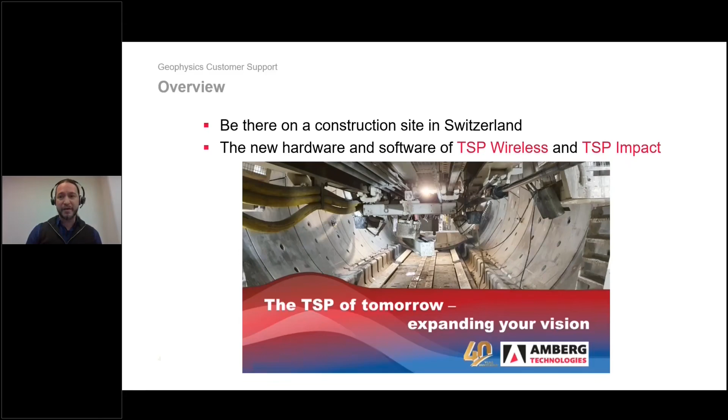So let's join me on a travel now in Switzerland. Good day to you all. I'm sending you today very warm greetings from Switzerland, and I hope to see you next time at your construction site or in your office. It's my great pleasure today to take you to a tunnel construction site where interesting things are going on. So be curious and come with me.

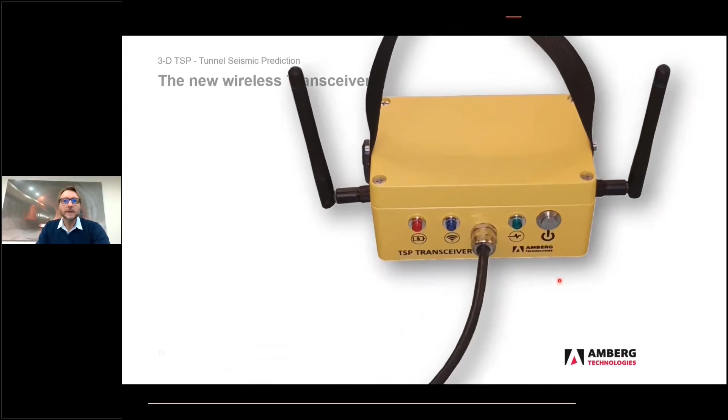So the wireless transceiver, as you can see, that little device over here, is to be attached via this cable to the receiver. You have seen that in the movie. And with a closer look at it, you see it consists of 2 Wi-Fi antennas. So we are using the Wi-Fi system either of the construction site itself, or we build up our own network. We have battery, Wi-Fi, and device status LEDs showing us at every time the status of the device.

And we have a power switch. On the side, we have a USB-C type charger and power supply socket with which you can easily charge the battery inside, or you can even attach a power bank, an external power supply, in case the internal battery is drained.

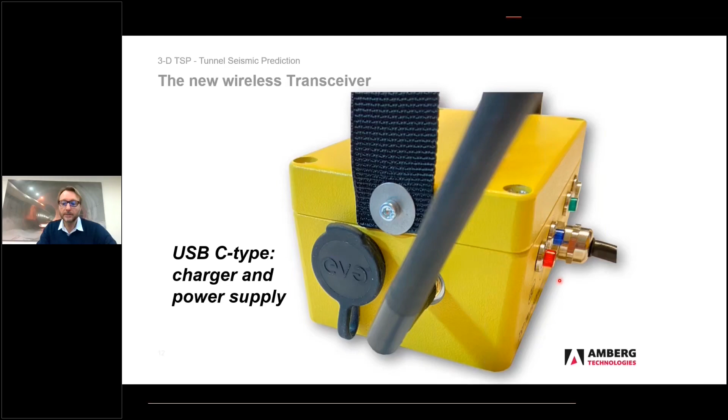You can also attach a little pen drive in case the wireless system fails and the shot, or the data of the shot, cannot be transferred. You easily attach a USB drive here and the data will be automatically loaded to this pen drive.

You see the specs here in an overview on power supply. This power supply inside the transceiver also powers the receiver itself. As you know, we are using an active accelerometer inside the receiver, so the power for that comes also from the transceiver here.

We have an integrated CPU, a processor, in that device, and this is, of course, with the highest precision of time synchronization across all transceivers. This is the biggest challenge of the whole wireless system: that we have the precise trigger moment, which is picked up from the trigger box and sent immediately to all the transceiver devices, and that we have, at the same time, in terms of microsecond precision, the trigger time to all receivers.

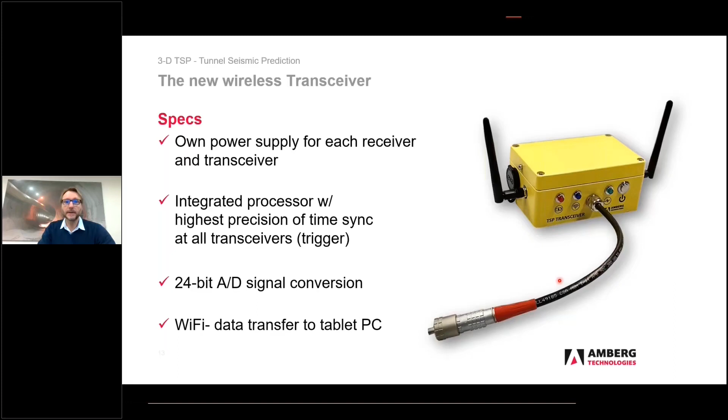In a common way, that's a 24-bit AD signal conversion, and that will be transferred to the tablet PC, which is also equipped with Wi-Fi.

So the new trigger box consists of very similar components as we have seen with the transceiver. We have again these 3 LEDs: battery status, Wi-Fi status, device status. We have the power switch, 2 Wi-Fi antennas, and the USB-C charger and power supply socket on the side. What you see on the right-hand side here is what you already know from the existing TSP trigger box. We have the trigger switch where you can attach a hammer or any other kind of source.

And we have here the socket where the cable to the blaster machine is attached, and the sockets for the instant detonator. So we're using detonators inside a borehole, or using non-electric detonators using the wire break trigger functionality over here.

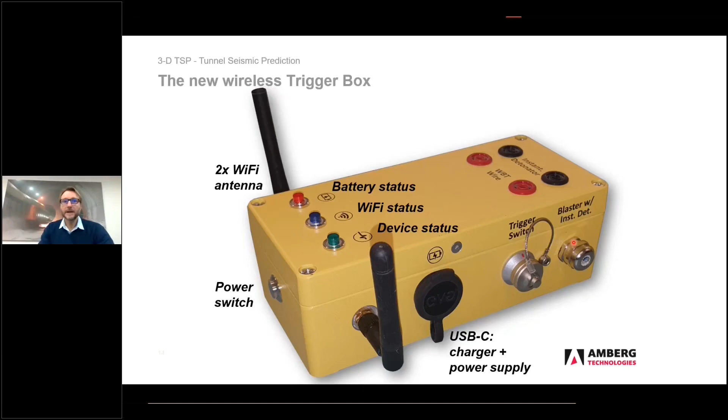So that is the same. Despite this, we have the same housing. So the same housing we could keep, and now also on that side we have the whole wireless solution. Again, there's this own power supply inside, a battery, which also feeds the little current which we need for the wire break trigger mechanism. We have this integrated processor inside here, and we support all kinds of trigger modes as usual, especially for blasting, but also for using a sledgehammer or the new impact hammer. Wi-Fi transfer, as you see from the components, is also given.

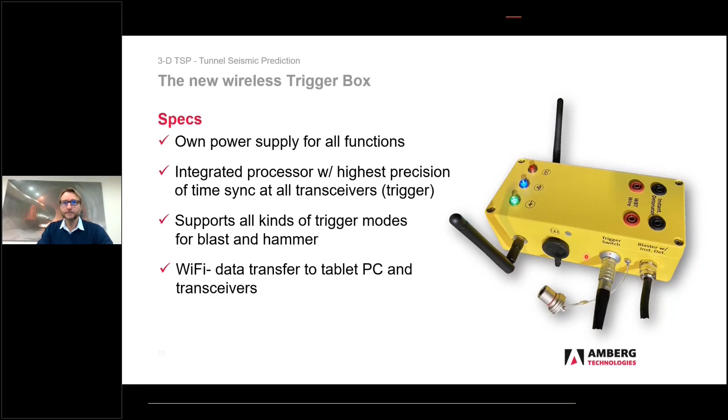So all the trigger signal is sent to the transceivers, and then from there to the PC. So how does the new receiver look? You have seen that in the movie as well. The whole receiver looks similar, but is different, as you see from that piece here.

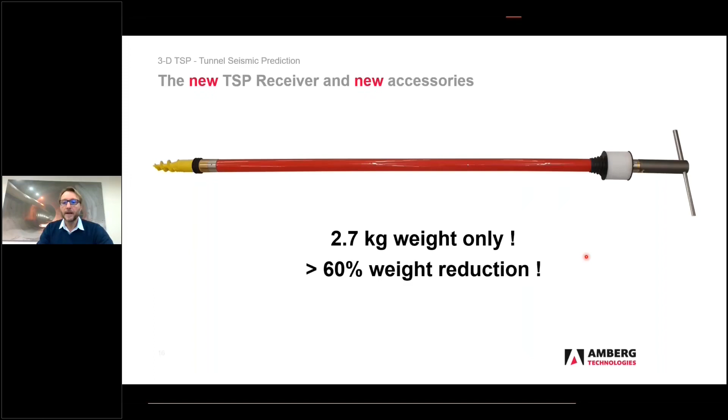The good thing is it only weighs 2.7 kilograms. All what you see in that figure is 2.7 kilograms only, including the protection tube, the receiver inside the dowel, and even the installation tool. And that is a plus 60% weight reduction compared to the existing system.

If you go a little bit into the single components, you see the protection tube now consists of just one piece. That is a good thing, so you have less operation or assembly time in the tunnel. We have a little plug cone at the end, which plugs the borehole mouth, and the whole thing is only 140 centimeters long. It's one piece, but one longer piece.

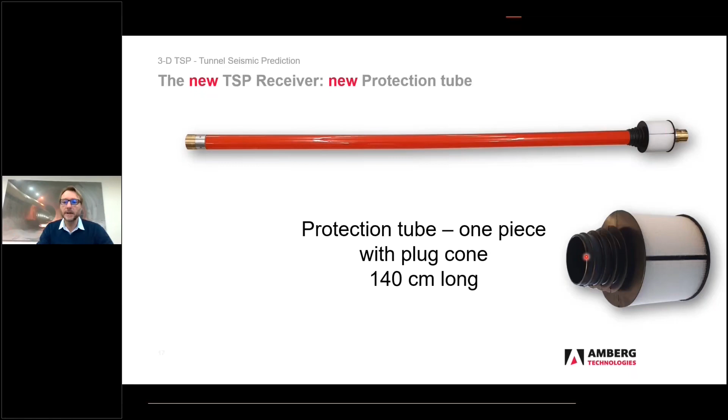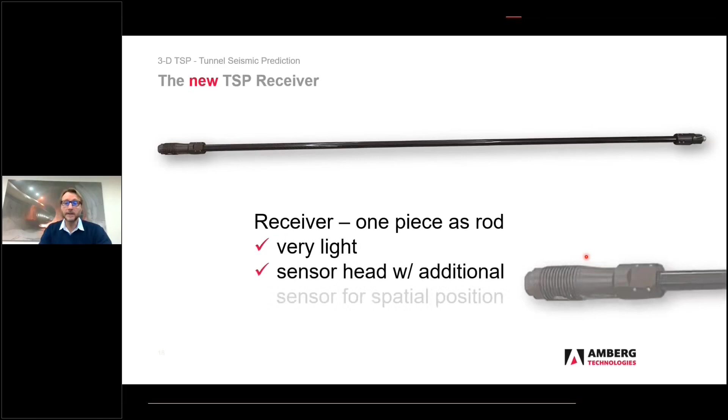So as you see from that, we have reduced the receiver size in length to 1.5 meters actually, as you see here how the receiver looks like. It's also one piece as a rod, and very, very light. What you see here in the middle part consists of a carbon rod, and we have used special aluminum for the left and right end sides.

What is also new is that beside the accelerometer picking up the seismic waves, we have added an additional sensor which picks up the spatial position of the receiver inside the borehole. We come to that later on. The whole is 150 centimeters long, so in future, even for boreholes if you're still working with explosive, we just need 150 centimeter long boreholes for receivers, so it's just one length.

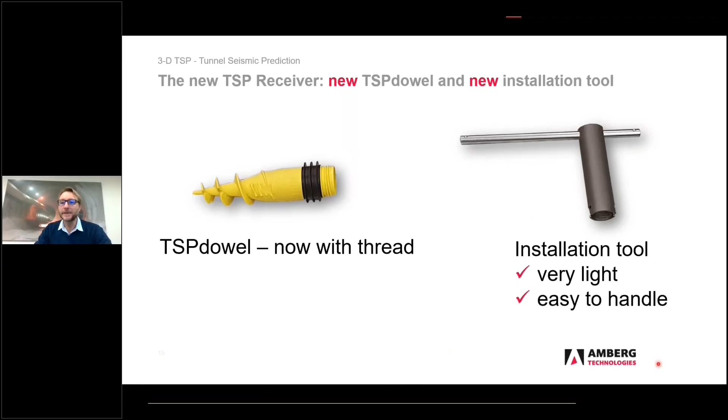So Joseph is now taking over. As Thomas mentioned before, we have included now a new sensor in the receiver. This is an integrated high performance e-compass, and this is an ultra compact sensor, as you can see here in this picture in the ruler.

So it is installed inside the sensor head, and it will make automatic measurement of these angles, the position of the sensor inside the borehole. So we mean the vertical, twist, and horizontal angle.

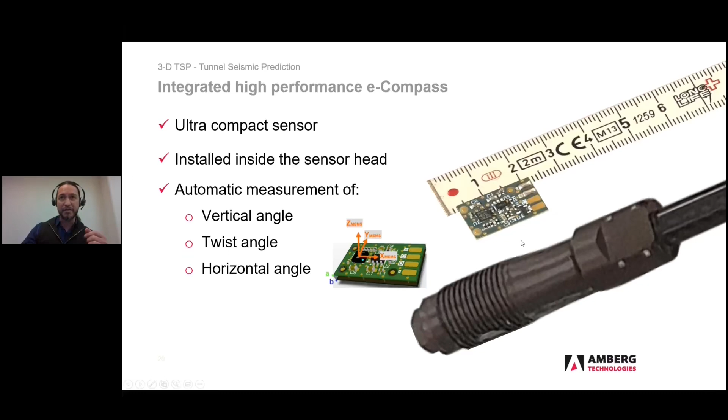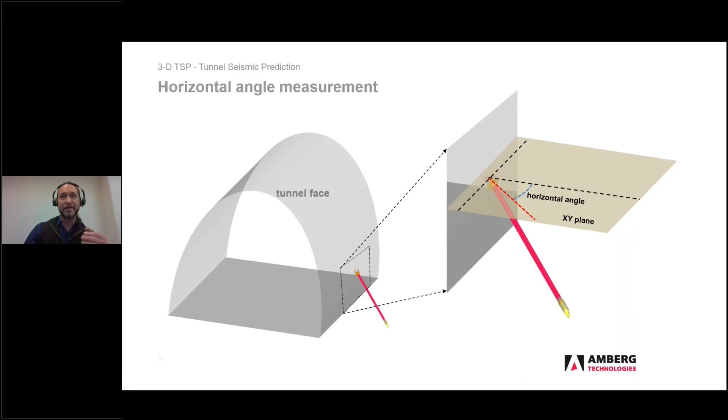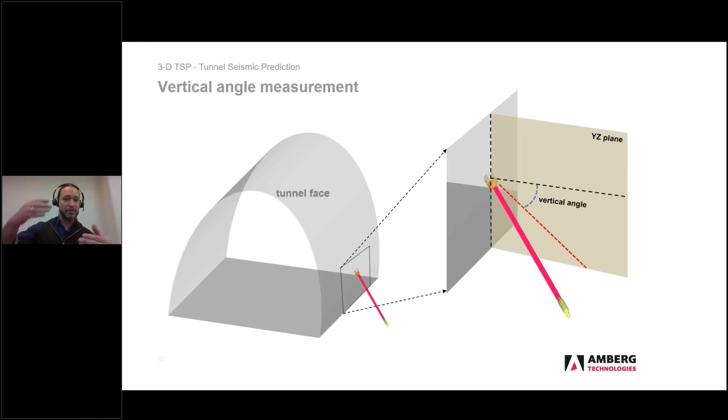So when we mention these angles, you know very well, but let's show you shortly. We are measuring automatically the deviation of this tunnel with respect to this plane, in the horizontal. We have the vertical angle also. You know that we use the spirit level to measure this, and also we can measure now automatically what we call the twist angle.

As Thomas mentioned, data acquisition now is in a very easy way. We have a very lightweight system, so it's autonomous, very fast to assemble or mount in the boreholes, reliable, accurate, and we have a long battery lifetime. So for the entire system, we have a weight reduction of 50%.

It's also easy to use in the software. I'm going to show you now in a nice video we have prepared.

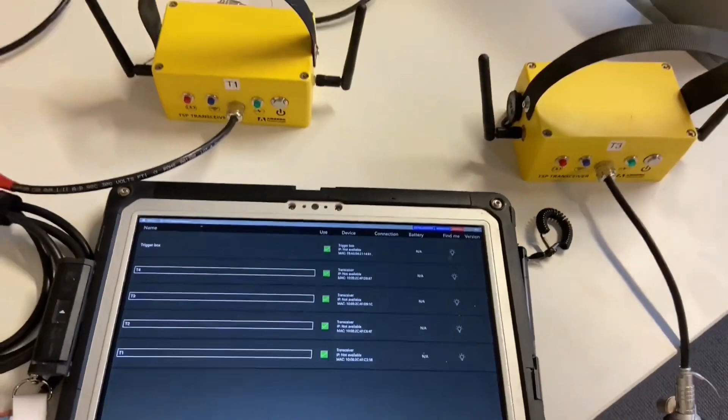Now we are in the software, Amberg TSP acquisition. First we will go to the home page. Now we go to settings. We have Wi-Fi devices, and here you can see all 5 devices. They are still not connected to the tablet.

Now we are going to start each of these devices, turn it on, one by one. Since we have already established a Wi-Fi access point between the tablet and the devices, you see one appears already on the tablet, it has been recognized. It takes a little bit because they are booting the processors, each of them. We will see the next one appearing. We see the status of the Wi-Fi and the status of the battery. Now we have all of them connected.

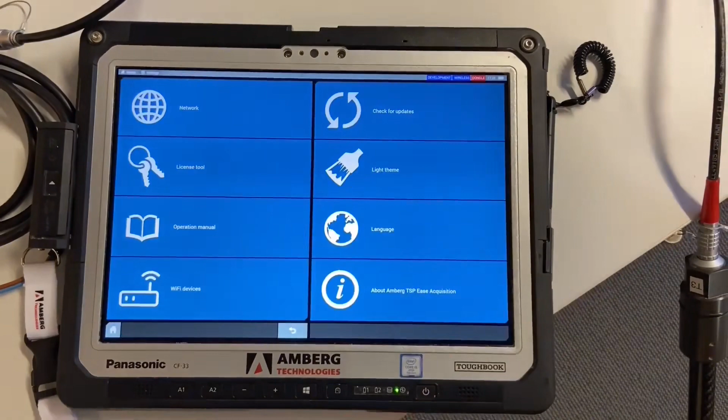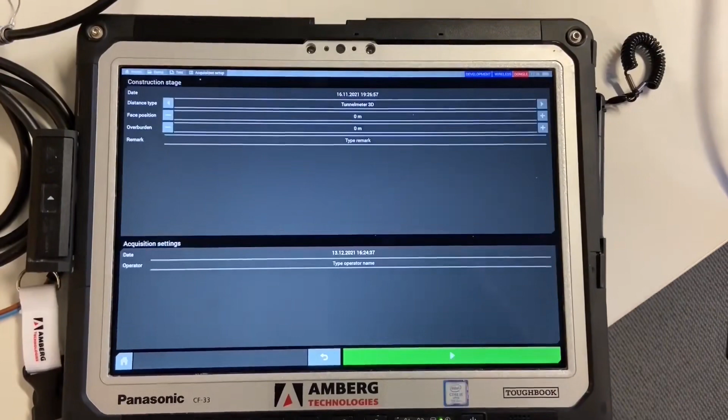We go now to the home page again, and now we go into one project. I select any campaign for this demonstration. You will see now we are in the acquisition wizard, as you already know it. There is one new feature here that you are looking at now, this geometry editor. I'll tell you this will be the next topic in our next user webinar.

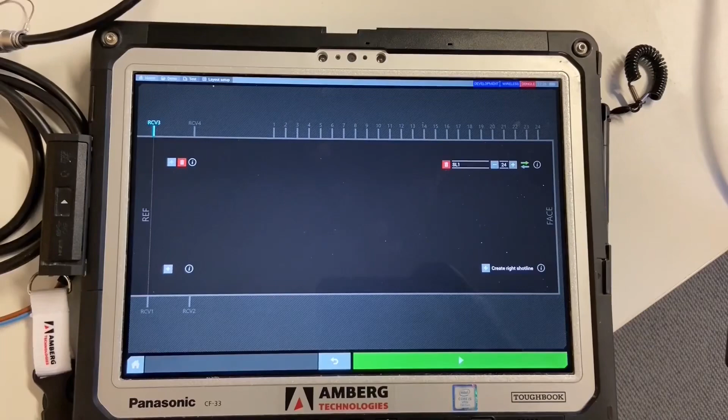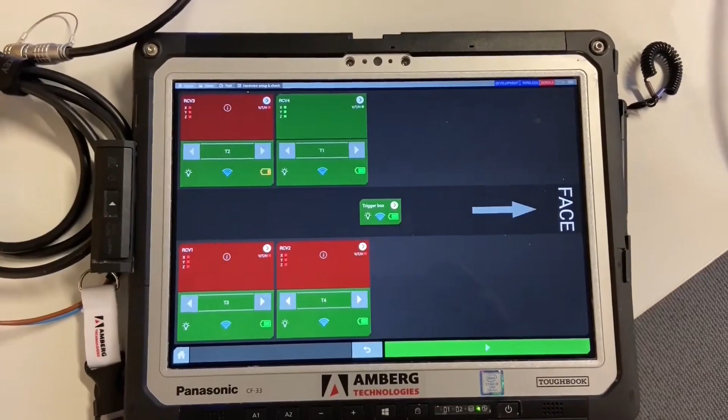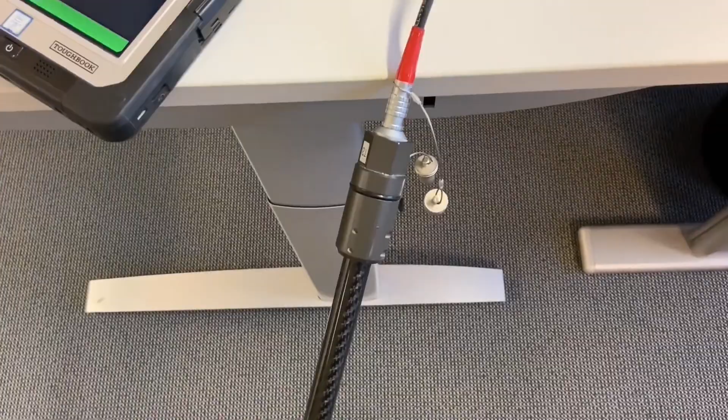Now we are in hardware setup and check. You see all the devices are connected and recognized by the tablet. This is the indication in the lower pane of each of these transceivers, as you can see here, showing also their position with respect to the tunnel face. We have only one connected to a receiver. It's this one that appears everything in green, everything is right.

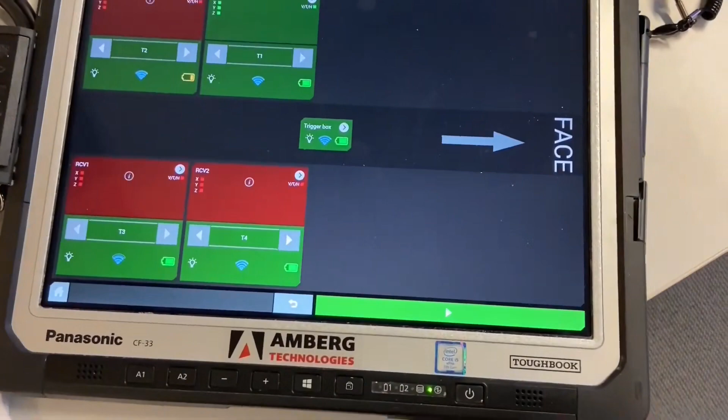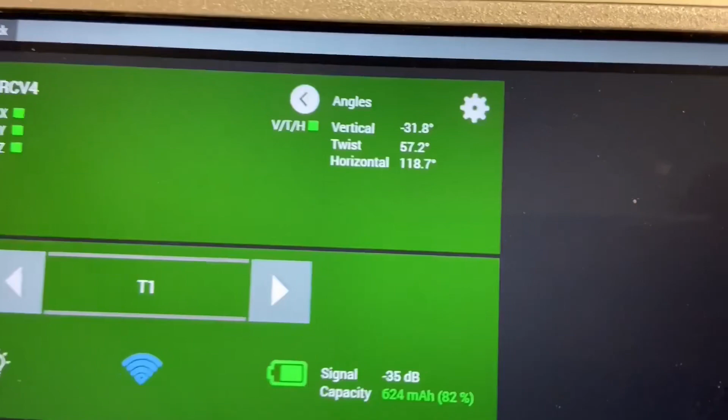We use the same coloring as in the existing acquisition software. As you see, this is transceiver number 1, connected to a receiver. We have the receiver placed between the desktop and the floor, with some angle, more or less obliquely, about 30 degrees.

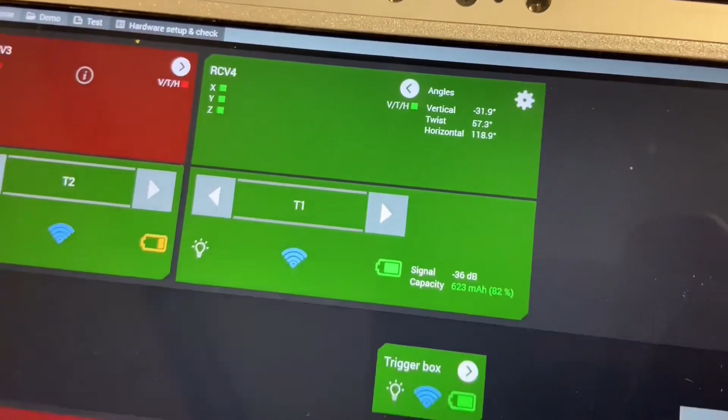Okay, now we go to the software again. We want to show you this new feature, the angles that are now streamed by this sensor, this e-compass. You see the vertical angle is about minus 32, because it's pointing downwards. We also see the twist and horizontal angles.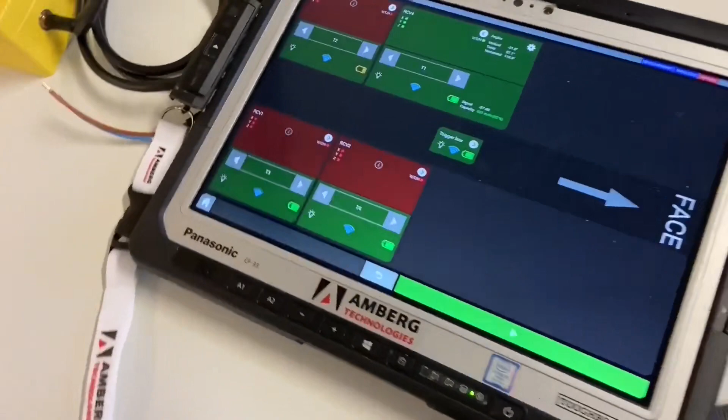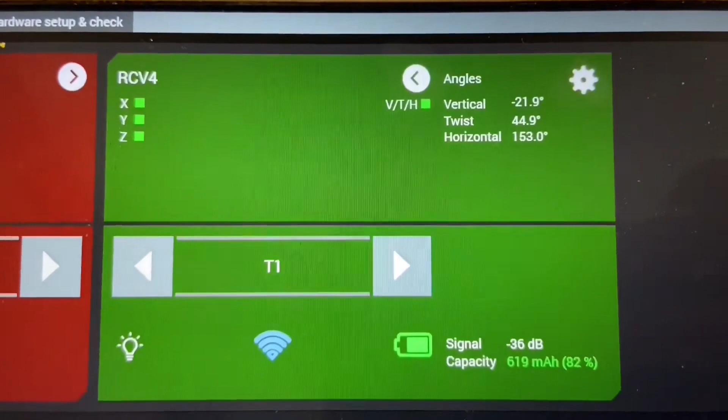Now you see the vertical has changed to almost 3 degrees. Now I will move it downwards, we go to minus values. I move it upwards, into positive values, then come back to horizontal.

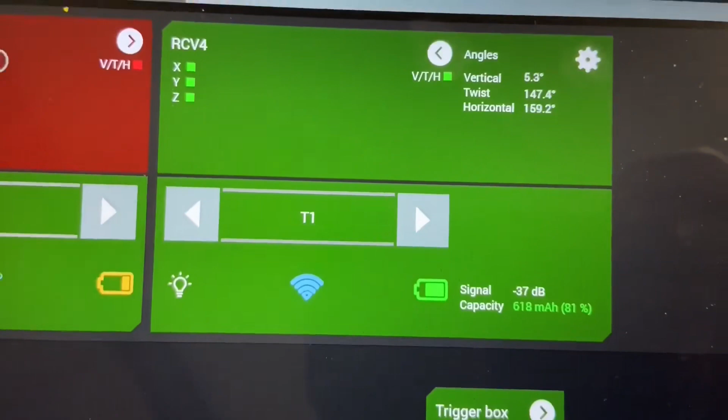Now I move the twist angle. You see the twist angle is changing from positive to negative values. Finally, I will move the horizontal angle, which is the azimuth of this receiver spatially.

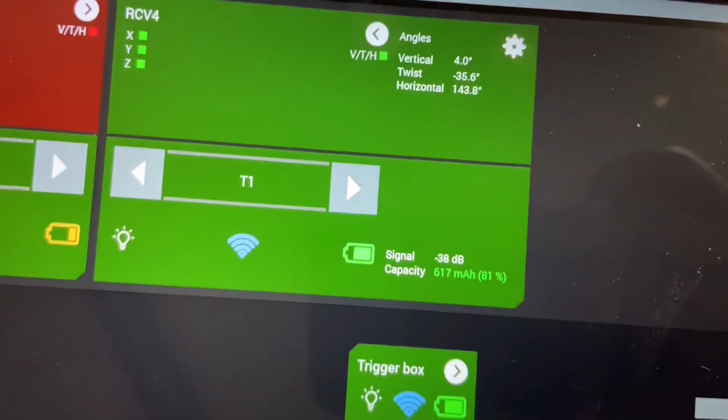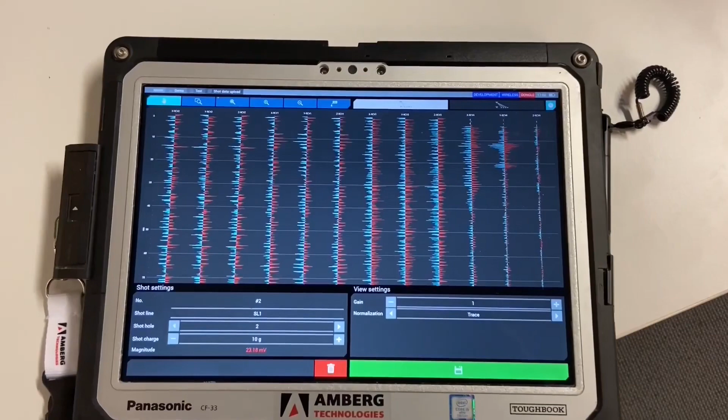Now we are in the ready for recording status. Now we simulate this with the trigger switch, and now you can see the data we have acquired. Of course, in 3 of the transceivers we have only electronic noise, but in the one where we have a receiver installed, now we can see the traces.

So now I'm back here. I'm taking over, explaining you now the next topic, which is about TSP impact.

TSP impact is using an impact hammer, as you can see from that sketch here. For example, in a TBM environment, as you have seen from the movie, the hammer was installed on a console on the left-hand side. In that case, it can also be the right-hand side, but it's on the side wall at a position where it fits well into the TBM housing. Even if there is a shield around, as you have seen in the movie, there's a little gap which can be opened for this double shield machine, where you can then install the hammer and let it strike every time a stroke of the TBM is finished.

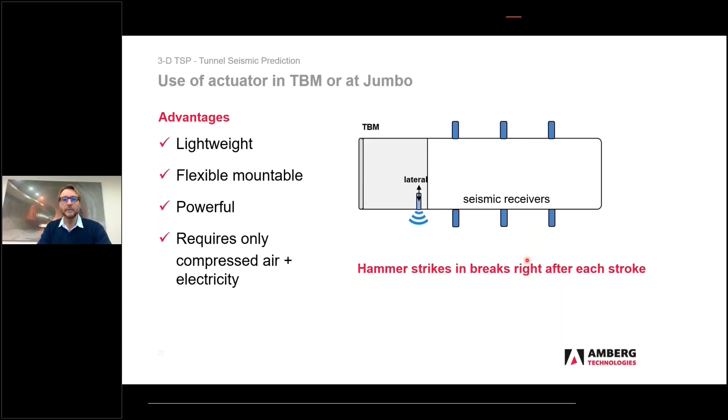That is given here, so you can use 4 or even 6 receivers. This is very lightweight, as you see. You have seen in the movie how the mounting of the receivers is done. You don't need anything else, you just install the receivers. The hammer, once installed, keeps striking every time there is a little break with the TBM.

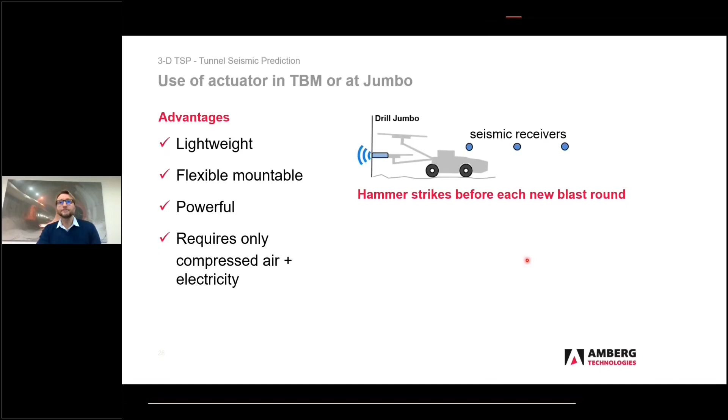You can use that as well. For example, install the hammer on a drill jumbo, or any kind of vehicle inside the tunnel. It can also be a little vehicle where you install the hammer at the front and move the vehicle stepwise, as we know from using blasting in boreholes. We can use that also in this kind of conventional tunneling work. That will then, of course, replace the drilling of boreholes and providing all the explosives.

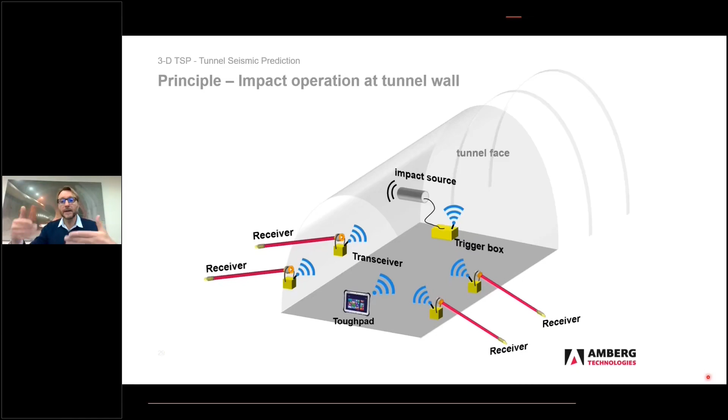For blasting, you don't need a blasting master, you don't need any kind of blasting material. You just provide this kind of vehicle, which is dedicated for this kind of job. We have seen that figure already here. So this kind of impact source is then hitting on the sidewall. It can also hit on the face, in case you want additional shot lines, you can even use that at the face itself.

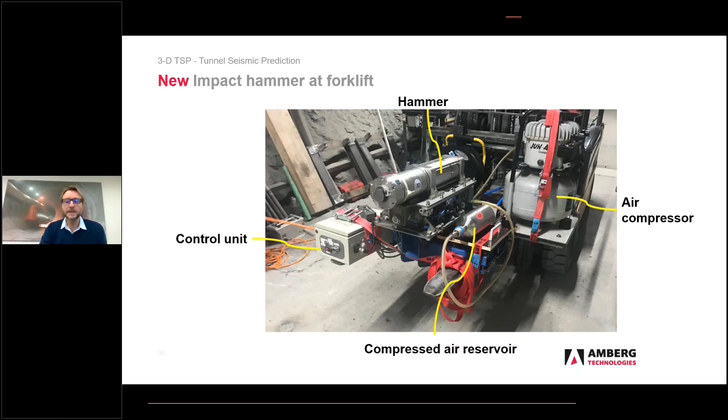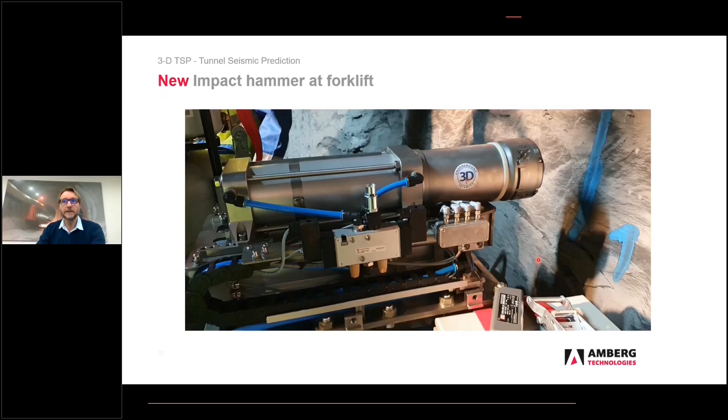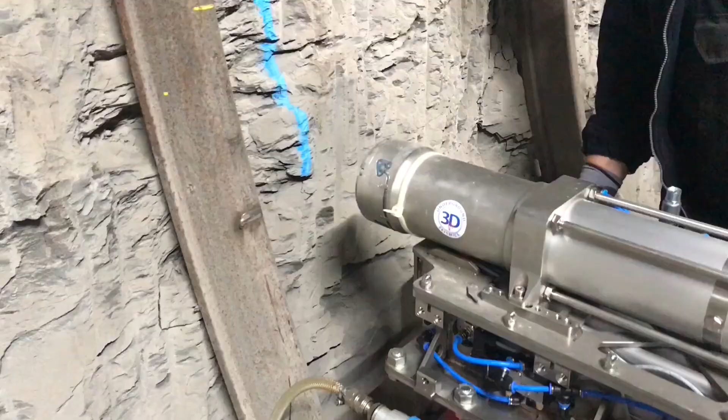That is the hammer, and here it is positioned in front of the sidewall. We have also provided a little video here. So it's pre-stressing.

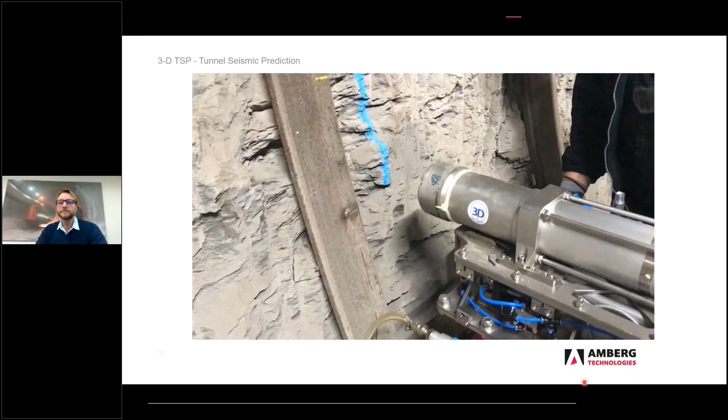First of all, now you should see the hammer installed at a little mini excavator—it's not visible yet. Okay, now you should see that: the hammer installed upside down at a little mini excavator. So you see the hammer can be used in any kind of position, whether it is inclined, whether it is upside down, whether it should hit the ground or the ceiling. It always works like this.

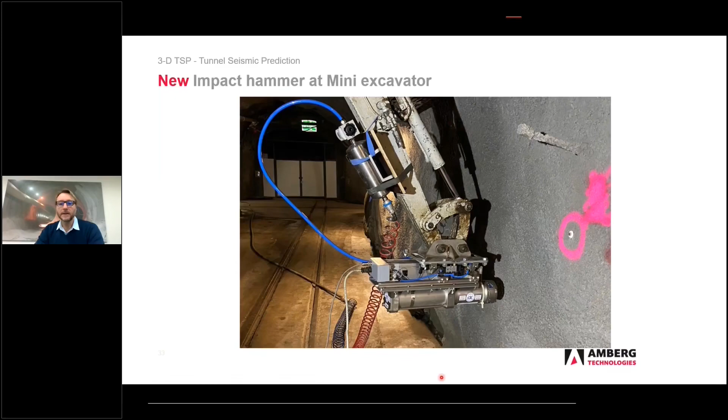So we just have the air compressor connection here and the installation of the electric cable over here, and that's what you need for that hammer. So I'm starting in the next little sequence of strikes.

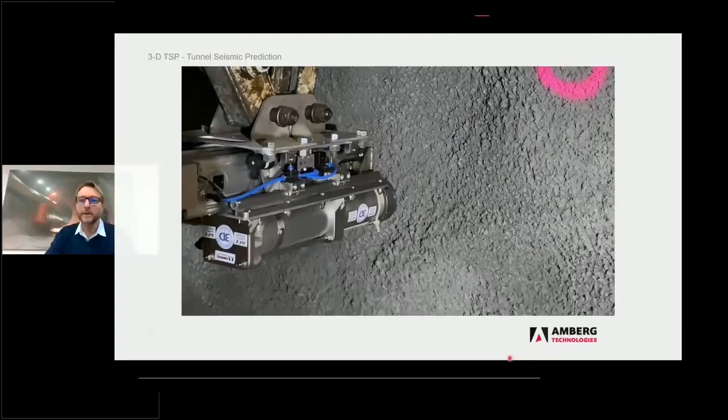See how fast it works on this concrete layer here. So every few seconds you can release strikes and get many strikes on the same position. That is actually wanted, and this is what we later do in the processing when we have stacking of data. But that is another topic which we already explained to you, but which we may repeat also in one of the next seminars.

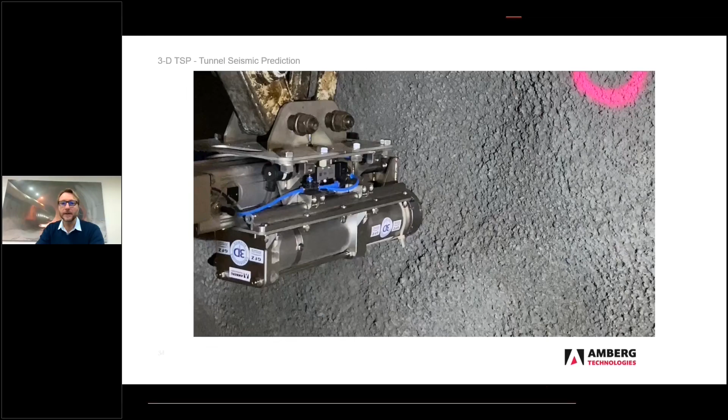Okay, you see now a little bit about specs. So the hammer and the base, as I said, the good thing is that both can be separated from each other by just releasing those 4 screws on both sides. That's quickly done. So each part, the hammer itself and the base, weighs 28 kilograms. That is, of course, heavy, but not so heavy that nobody can carry it.

But you just need to install it once to a vehicle or to a platform console inside the TBM, and then it's done. You see we can have more than 15 strikes per minute. The only thing you need as a supply is 7 bar of compressed air. That is always given, for example, in a TBM, in a conventional heading, as I said, with a forklift or with a single dedicated vehicle. You can use a separate compressor line.

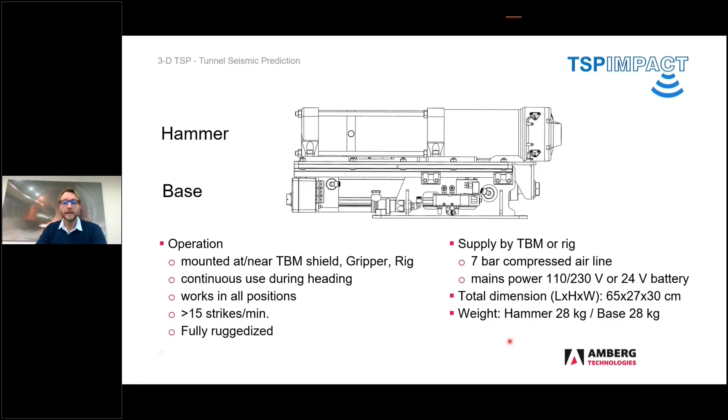We also need mains power supply, or if that is not given at all, we can use a 24-volt battery beside the hammer somewhere. Total dimensions, as you've seen from the video, are not really big, which is also a good thing. It's quite small and can be installed in normal sized TBMs under normal conditions.

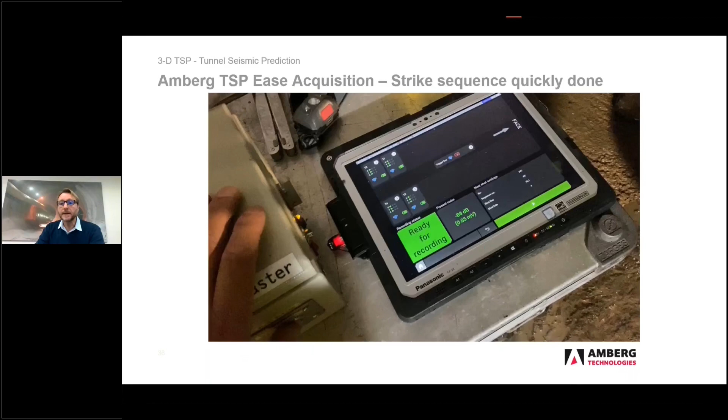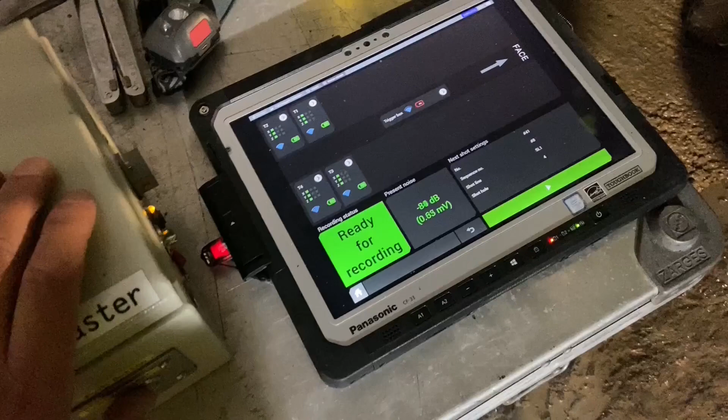The next video gives us a short sequence of shots. If you listen in the background, you hear the strikes, and you can see what happens inside the acquisition. It was ready for recording, waiting for devices.

We have here both transceivers and the trigger box. That was a nice shot. Trigger box, and then one guy is releasing the strikes one after each other.

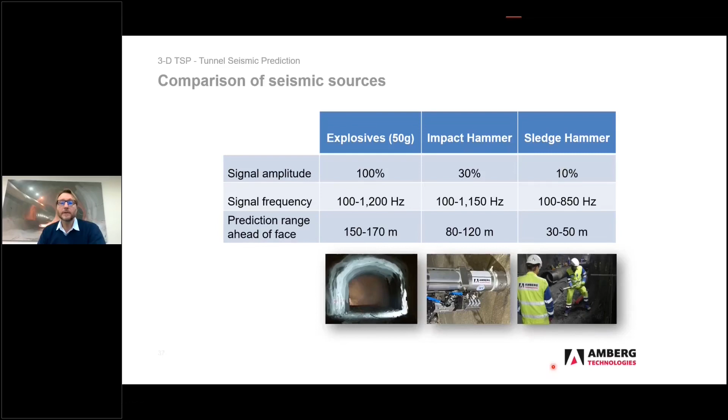That is a little overview we have done from our experience using explosives, using the impact hammer, the new one here, and using a sledgehammer, as you can see from the picture here. You can use the sledgehammer. Some of our customers already do, having a little hammer switch at the handle of the hammer, connecting it to the trigger switch socket at our trigger box, so you can easily get the strike from a manual hammer.

As you see, the energy with explosive, comparable maybe to 50 grams, we have this comparison taken almost at the same construction site, so with the same geology. This comparison is valid. What you see is that with explosive, we have about 3 times higher energy entry into the ground compared to impact hammer.

But we can stack all the data from different strikes at the same position. If you do 10 strikes at the same position, you can add the energy and enhance the signal to noise ratio, giving much better signal quality compared to other sources. Signal frequency, as you see, is almost the same, which is a good thing compared to explosives, whereas with a sledgehammer we are a little bit lower.

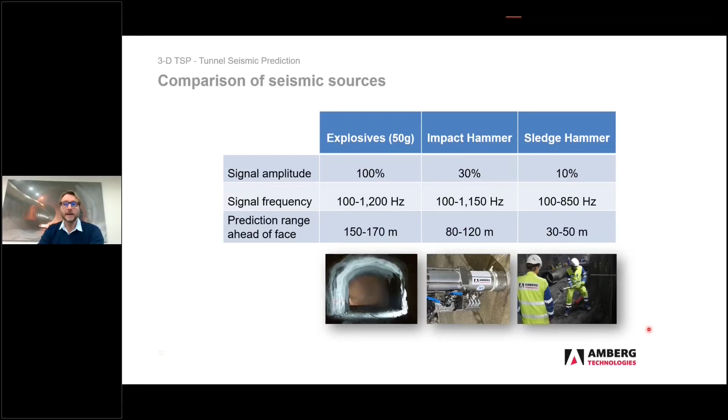So we come to an end of our webinar. We have introduced the next generation tunnel seismics to you. This adaptation of hardware and software is, we think, a further step to the digital transformation for the tunneling construction industry. We have smoother integration into the excavation work cycle. If you've watched the video, you see how easy it was to operate inside the tunnel. There is more comfort for the operators, not only from the weight point of view, but also from the assembly point of view and how to get rid of all the cables and operate the whole system once it is switched on. So everything is faster, easier inside the tunnel, and again, tremendous weight reduction, which is a very good plus point.